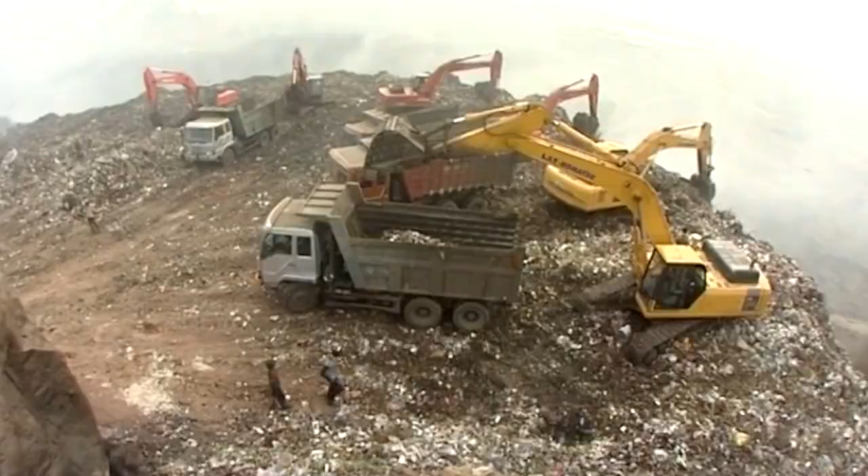The population growth, rapid urbanization and the changes in the city of Hyderabad has seen the coming of the Greater Hyderabad Municipal Corporation. The GHMC is the local government for the cities of Hyderabad and Secunderabad. Improper management of municipal waste by disposing it unscientifically into open dumps and landfills is creating huge problems to public health and environment.

With a commitment to better the environment and to provide the best sanitation services to the citizens of Hyderabad, Ramky Enviro Engineers, a pioneer in waste management, has established a quality delivery system, the Integrated Municipal Solid Waste Management Project. The HIMSW project uses the most environmentally sound strategies for municipal solid waste.

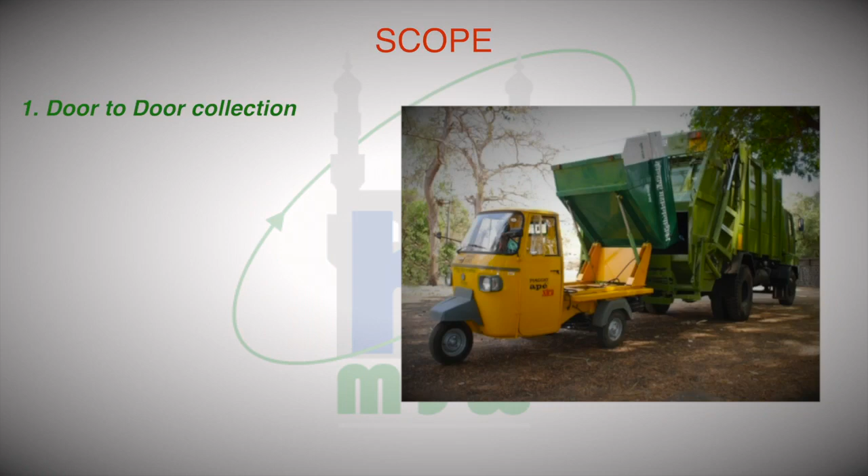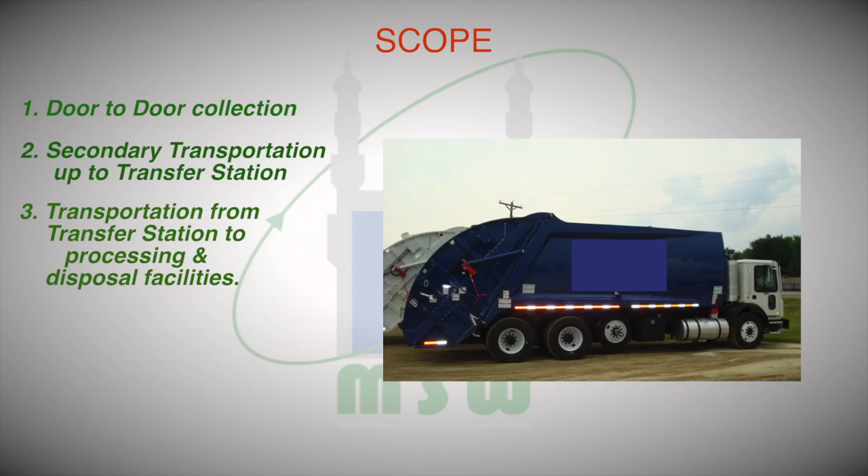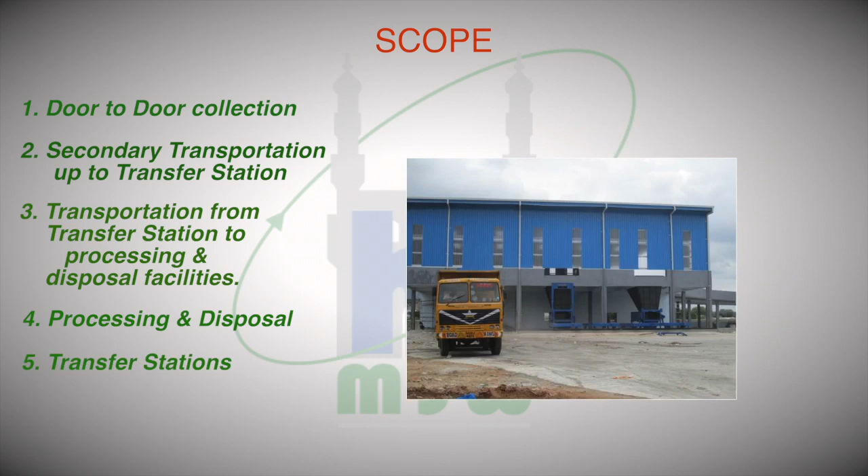Scope: door-to-door collection, secondary transportation up to transfer station, transportation from transfer station to processing and disposal facilities, processing and disposal, transfer stations, reclamation and alternative use of existing 4 dump sites.

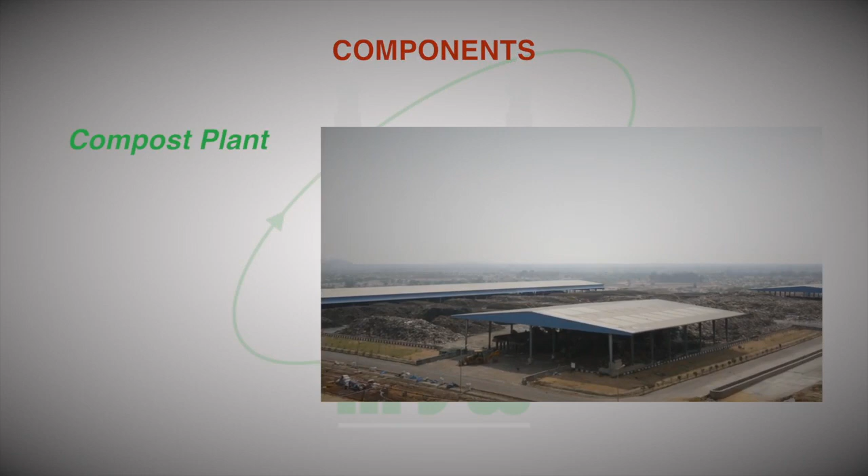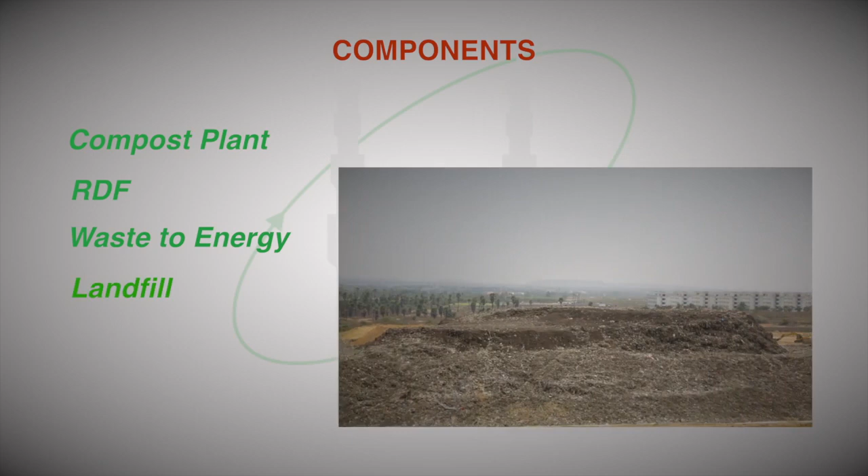Components: compost plant, refuse-derived fuel, waste to energy, landfill operations, capping of existing dump, leachate management.

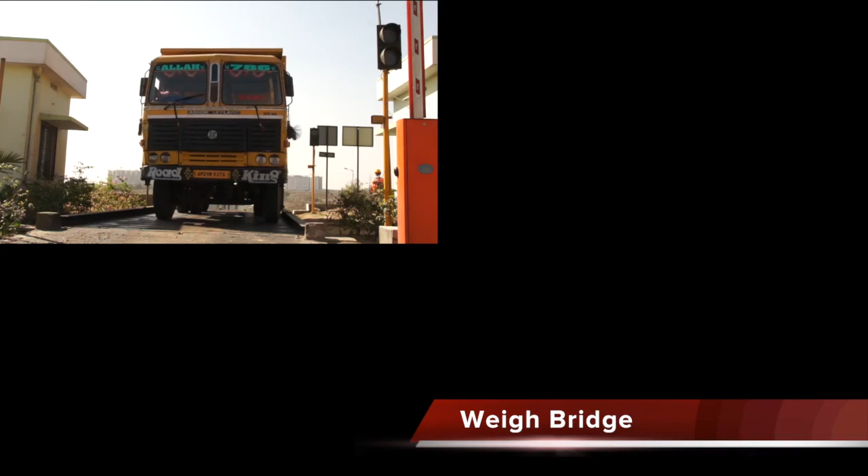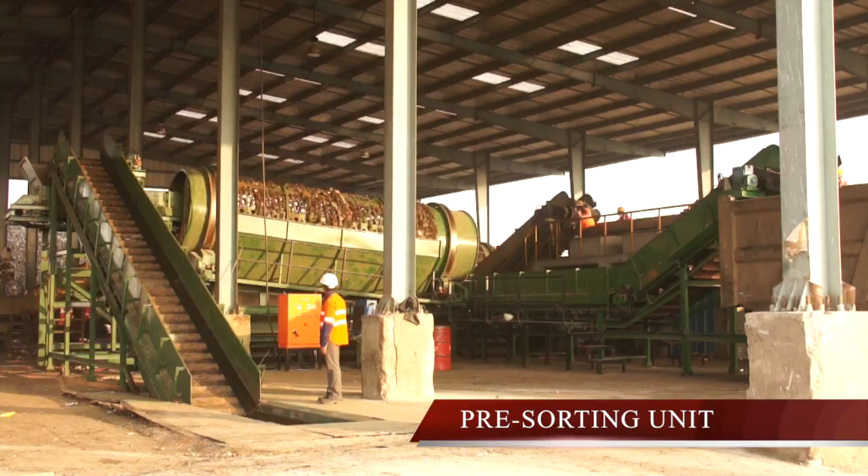The waste transported from the transfer stations is brought to the facility where each truckload is weighed and data entry is made using computers with data servers for storing and retrieving each entry. The weighed trucks are offloaded at the tipping floor of the pre-sorting unit and loaded onto conveyors using dozers. The waste is passed through a 100 mm rotating screen, or trommel, with screens of 100 mm sieves.

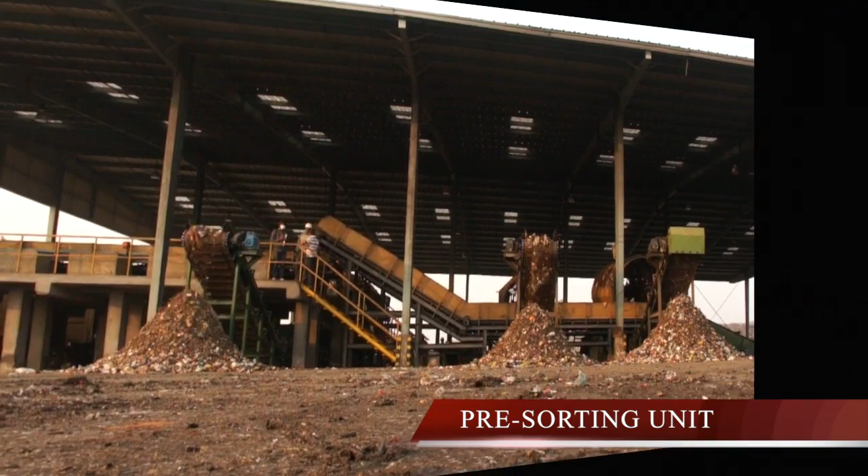The recyclable material, like plastic bottles, is recycled at a recycling plant inside the facility. The material besides the recyclables, with size more than 100 mm, is known as combustible material due to its high calorific value.

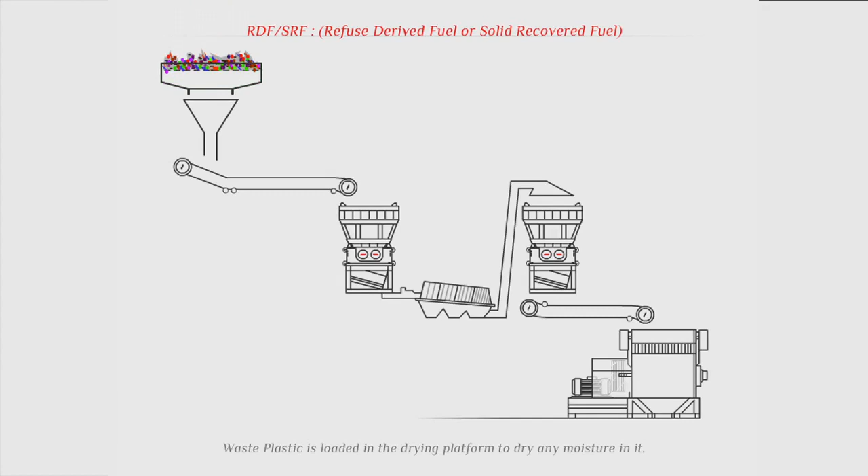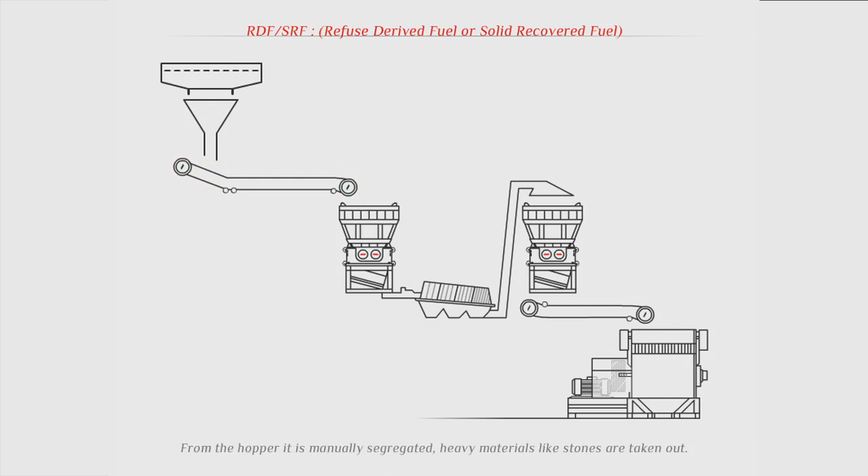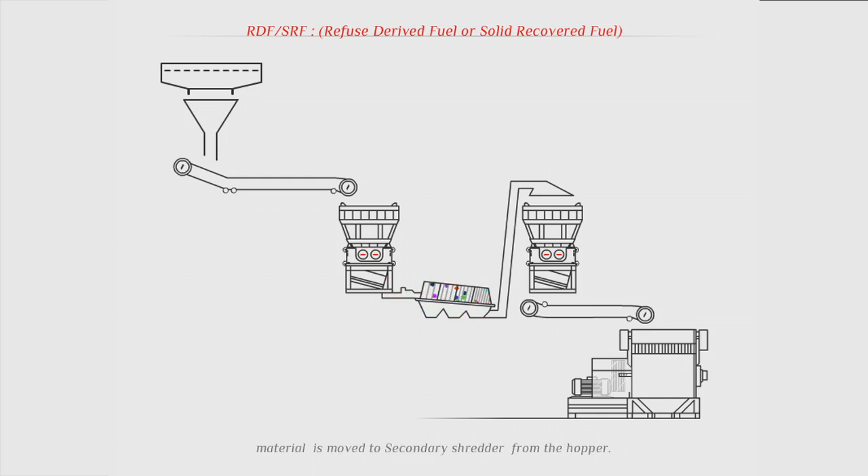Refuse-derived fuel: the segregated combustible material is further processed to get refuse-derived fuel, or solid recovered fuel. The combustible material is stored on a dry concrete platform to ensure maximum moisture removal by sun drying. The dried material is fed to the hopper of a primary shredder, where material greater than 100 mm is shredded to 80 to 100 mm material.

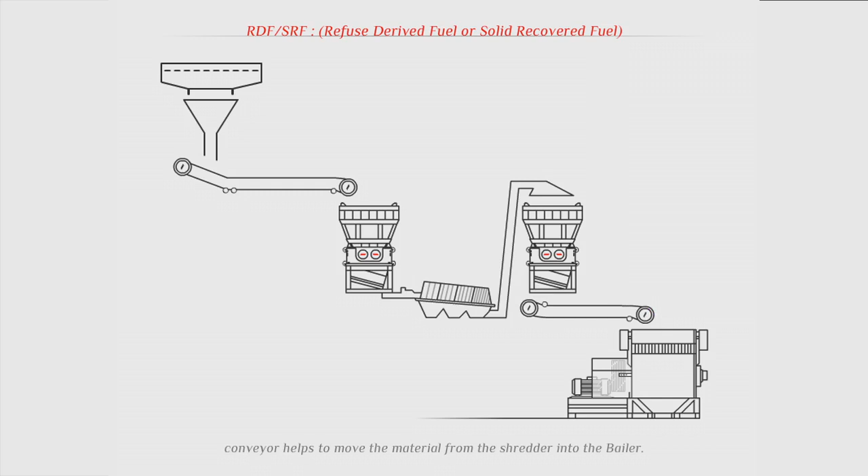The primary shredded material is fed to the hopper of a secondary shredder that reduces the material size to less than 25 mm. The secondary shredded material is then conveyed to a baling machine for packing the material. These bales are then stretch wrapped and transported to cement industries as fuel.

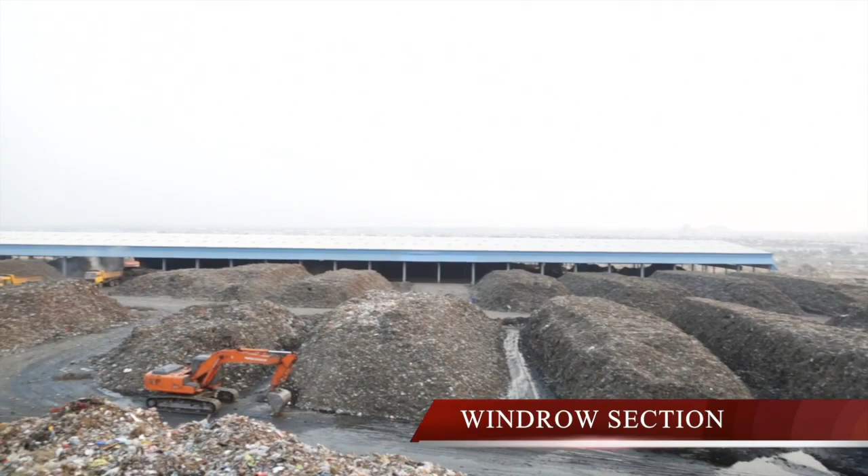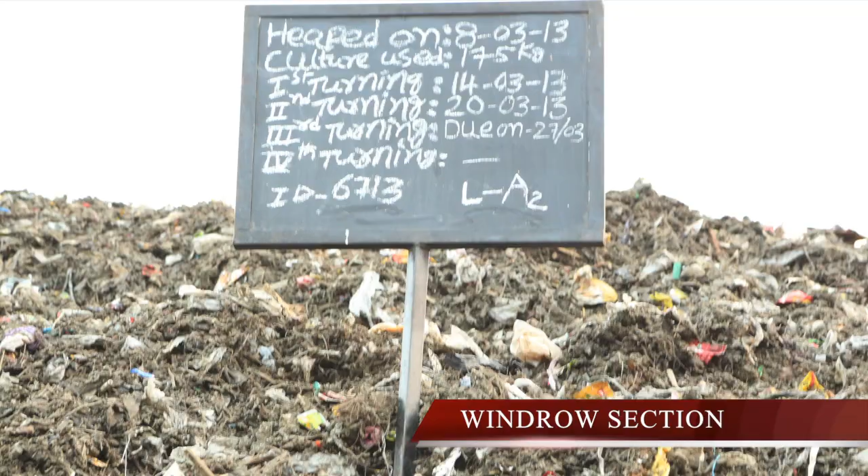The segregated material passing through the 100 mm sieves of the trommel is further processed using the windrows process. The windrows are turned for 28 days to ensure complete exposure of organic material to oxygen. The windrows are sprayed with herbal sanitizers to ensure better decomposition and ensure no odor is generated.

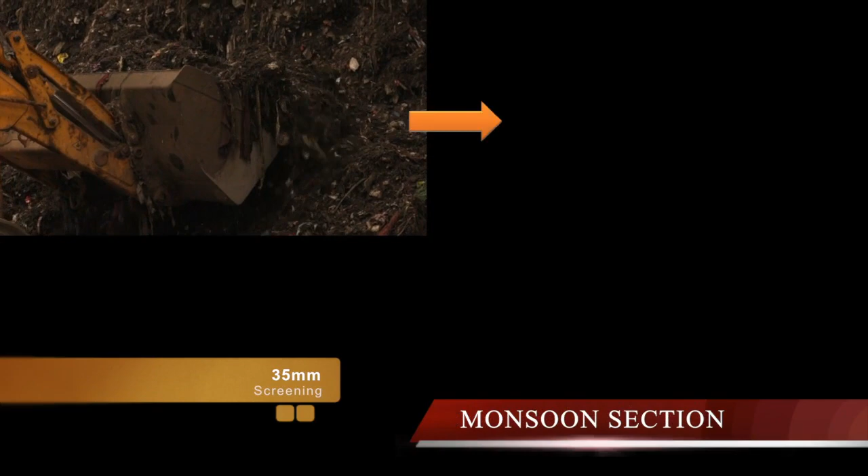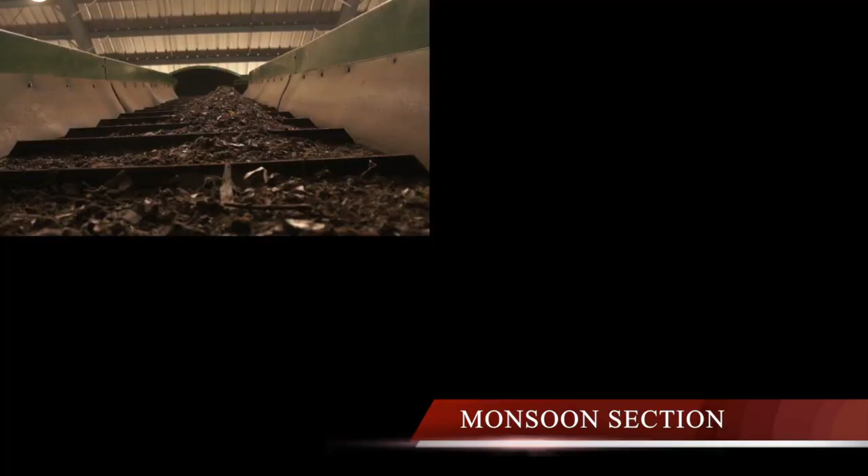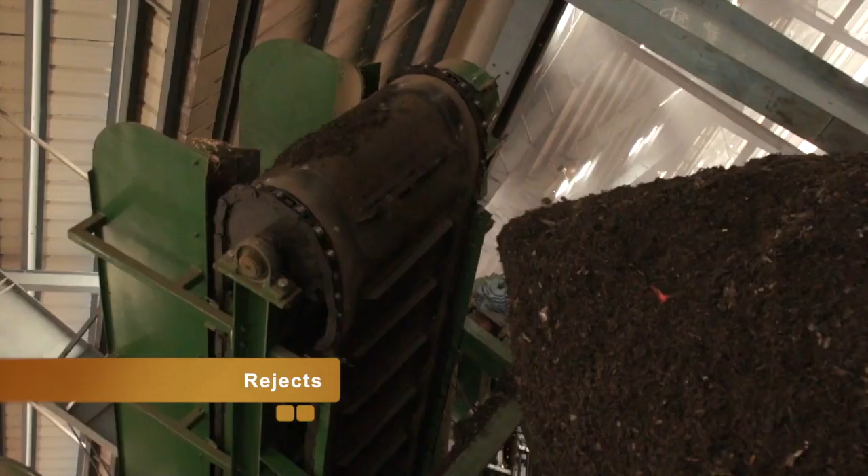The material from the windrows section is further refined by passing it through rotating screens of 35 mm sieves. The material with size more than 35 mm is segregated, which can be briquetted and used as an alternative fuel to fossil fuel in energy-intensive industries. Material less than 35 mm is further screened using trommels with screen or sieve size of 16 mm. The material with more than 16 mm size is segregated and briquetted for cement industries as fuel. The material less than 16 mm is stored in the curing section for final screening and curing.

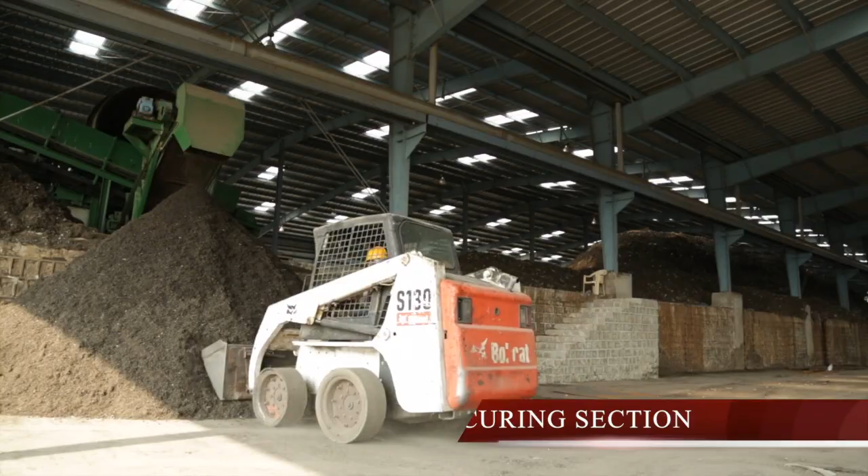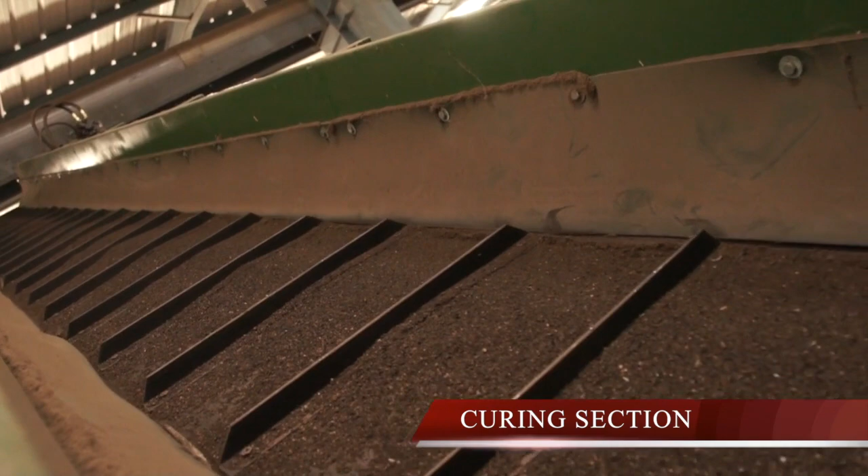In the curing section, the output of 16 mm screening is sent through a final set of screens or trommels, which segregates materials less than 4 mm. The final output is refined, meeting the fertilizer control order standards, and is used as biofertilizer in the agricultural sector.

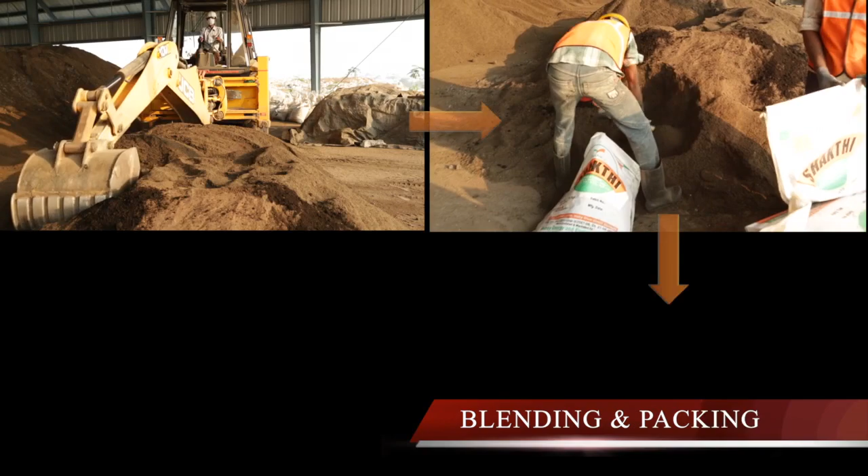The final output is further blended with additives to improve product value and packed in a blending and packing shed for dispatch to fertilizer companies. Other recovered products include coconut coir pith from shredding of coconuts.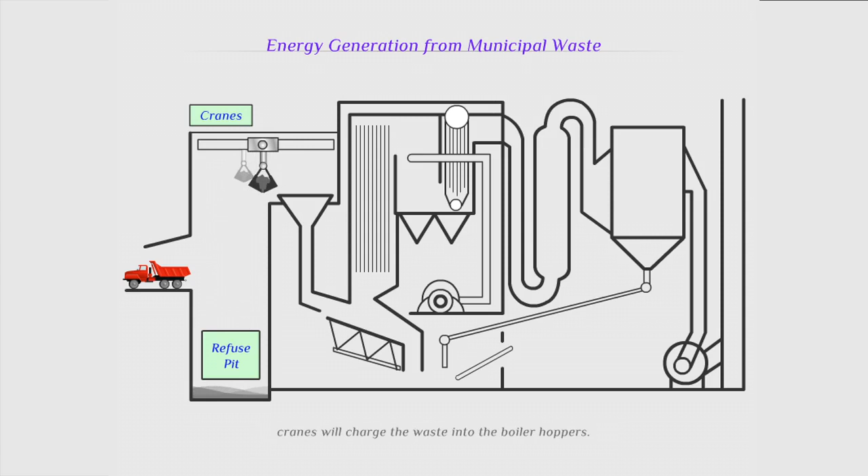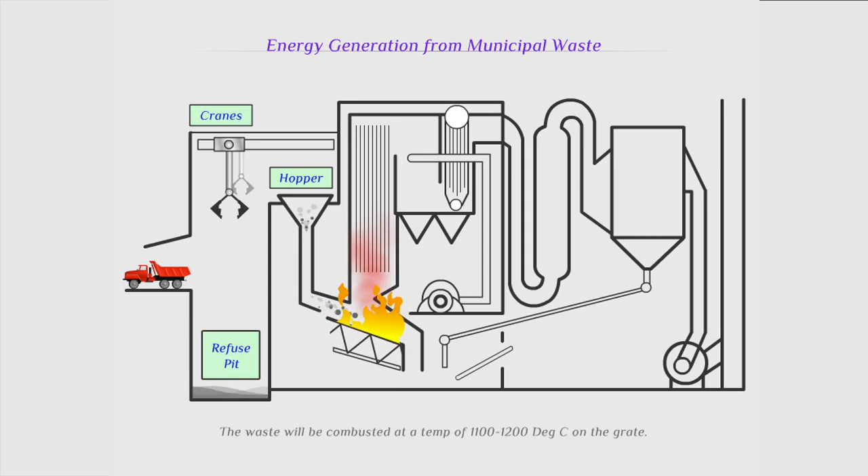The waste is then passed onto moving grates that combust it at a temperature of 1100 to 1200 degrees centigrade. The engineering design of the furnace ensures that the intermediate gases go through complete combustion to maintain a temperature of 850 degrees centigrade. Maintaining this temperature ensures that dioxins and furans are not formed in the process.

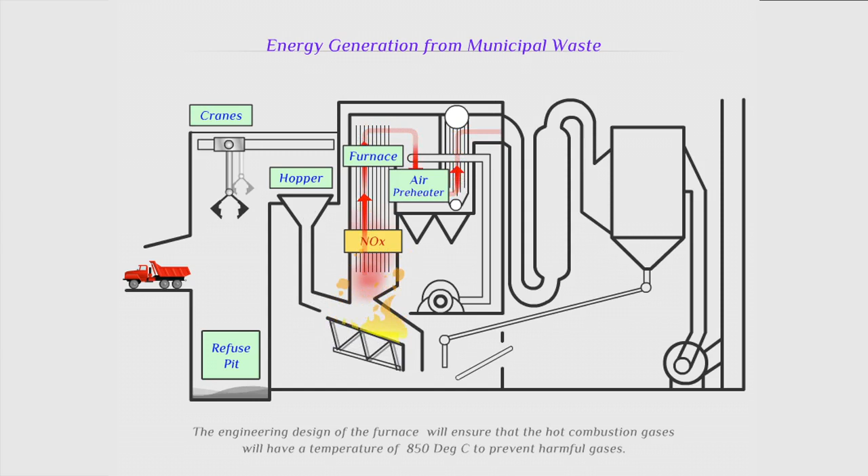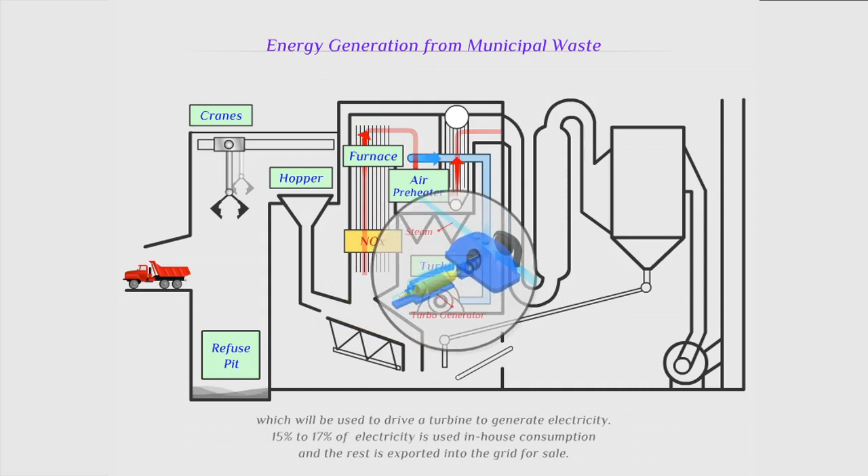The heat energy is passed into a boiler for generating superheated steam. This steam is used for driving the turbine and electricity generation. The electricity generated is exported to the grid after captive consumption of 15 to 17% of total electricity generation.

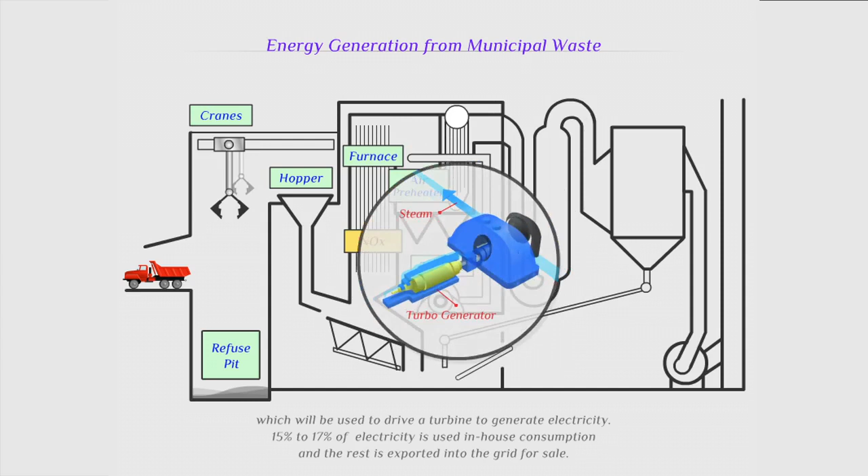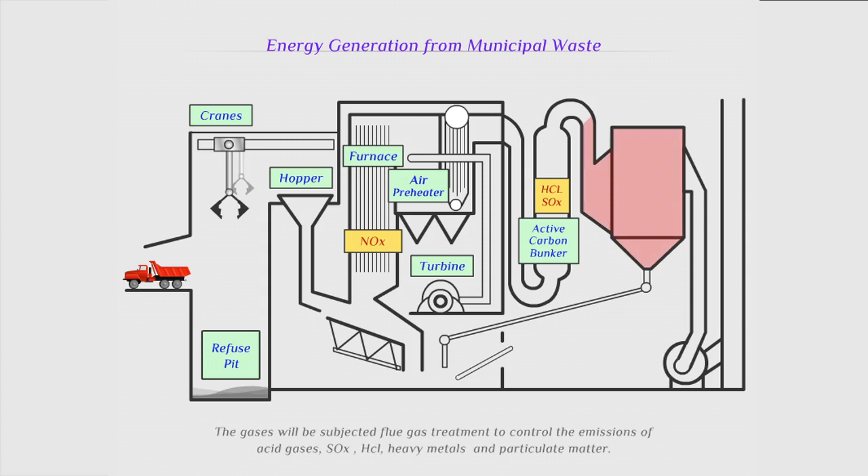The residual gases from the process are passed through an air pollution control system, which comprises scrubbers for removal of acidic gases such as nitrogen oxides, sulfur dioxide, hydrochloric gases, any heavy metals, and activated carbon filters. Any particulate matter is removed using dust collector systems and precipitators. The bottom ash from the incineration process is removed and can be used for construction purposes.

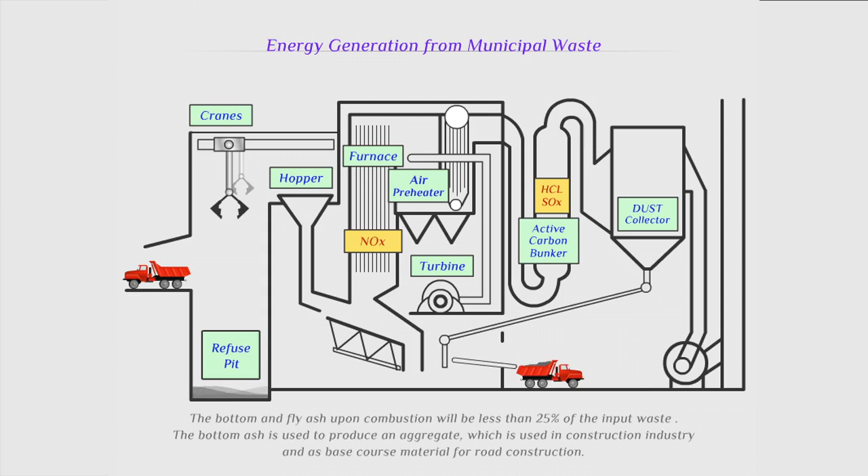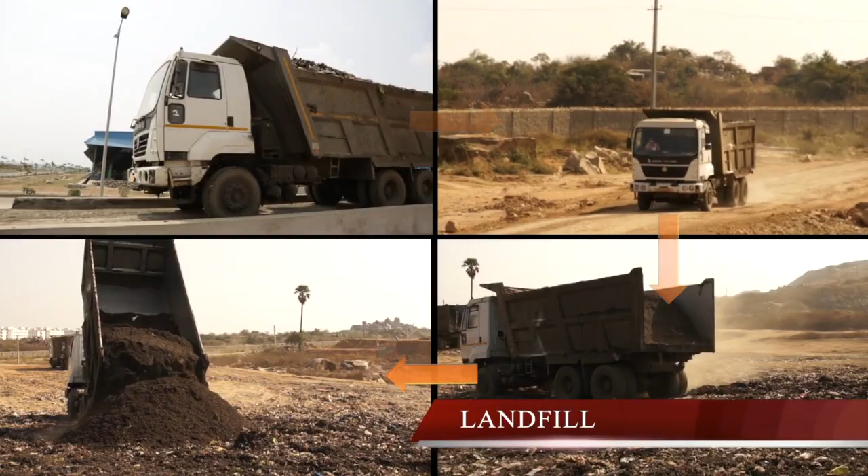Landfill. The processing of waste generates various byproducts. The inert material that is essentially present in the waste, or is a rejected material of the process, is disposed of in a secure landfill.

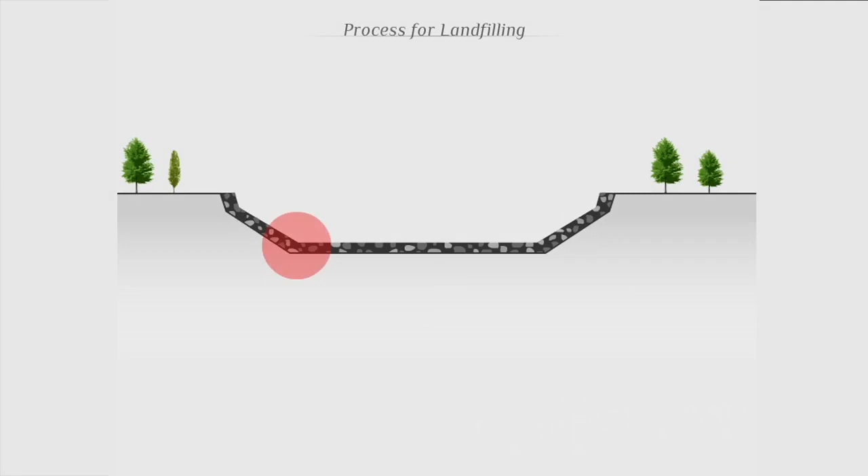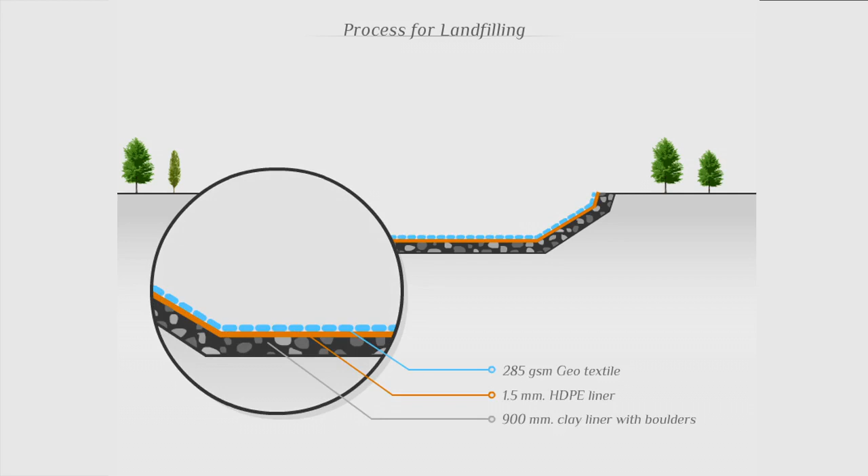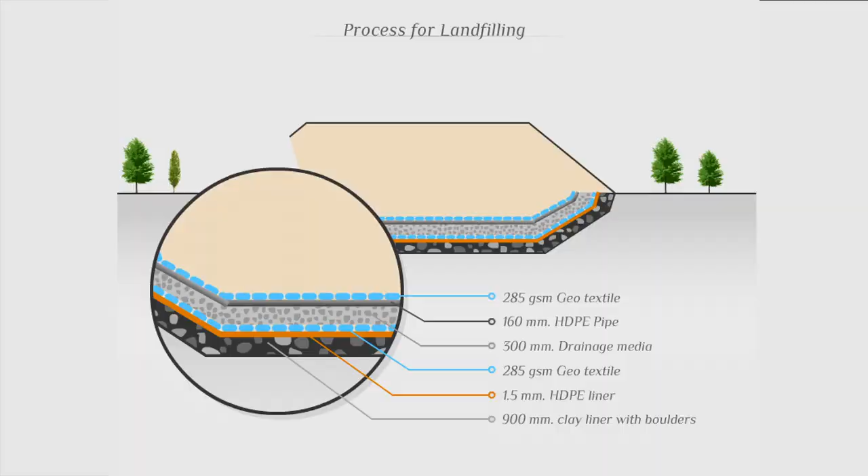The landfill comprises multiple layers of boulders, clay, HDPE sheets, geotextile, and a leachate collection network of HDPE material. These layers are of varying thickness to ensure that no leachate from the landfill percolates into the soil and groundwater. Landfill operations are closely monitored to record any leachate movement.

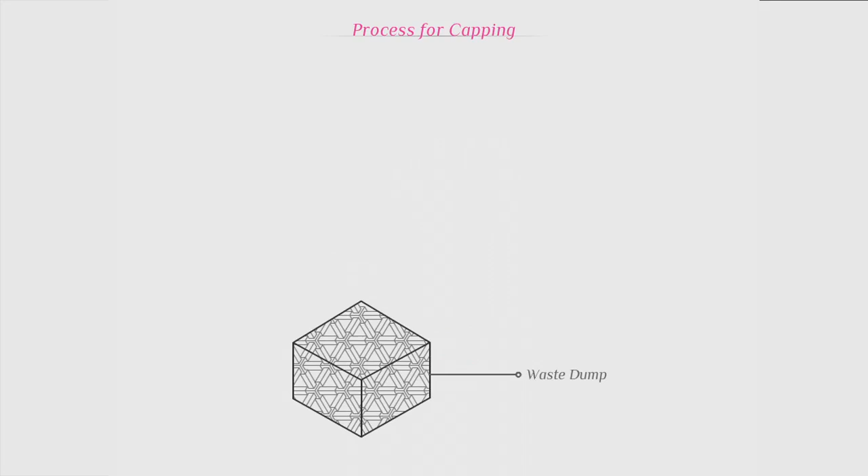Capping. The existing site for the waste management facility has a legacy of years of waste dumping. The waste dump is capped using scientific methods. The process requires laying an HDPE piping network for collection of leachate, covering of soil followed by clay lining, and geocomposites.

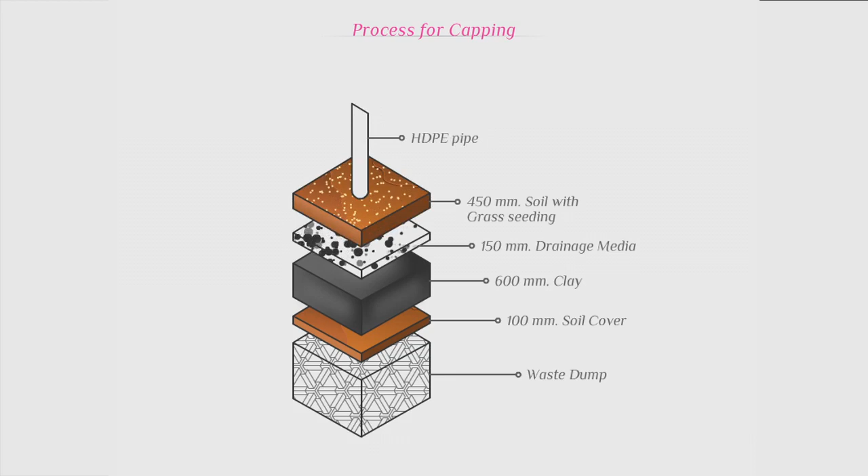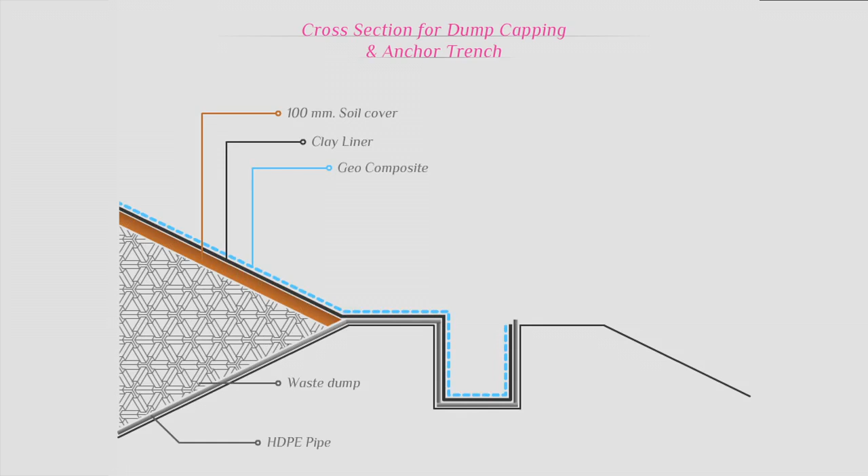An additional thicker soil layer and vegetation cover are applied. A piping network is also laid for collection of any methane gas and flaring, to mitigate release of greenhouse gas emissions.

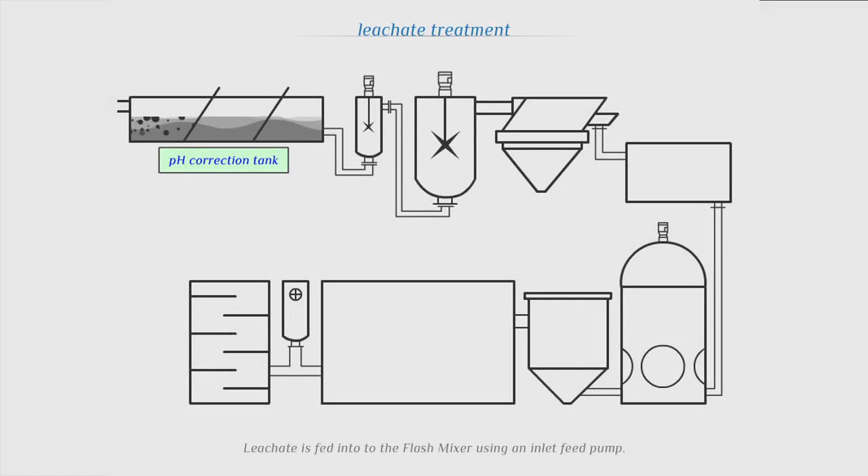Leachate management. Leachate management is a crucial aspect of the HIMSW project. All the waste stored and waste management processes generate leachate. The leachate generated at site is collected through an extensive pipeline network. Raw leachate is pumped to a chemical dosing tank with a flash mixer.

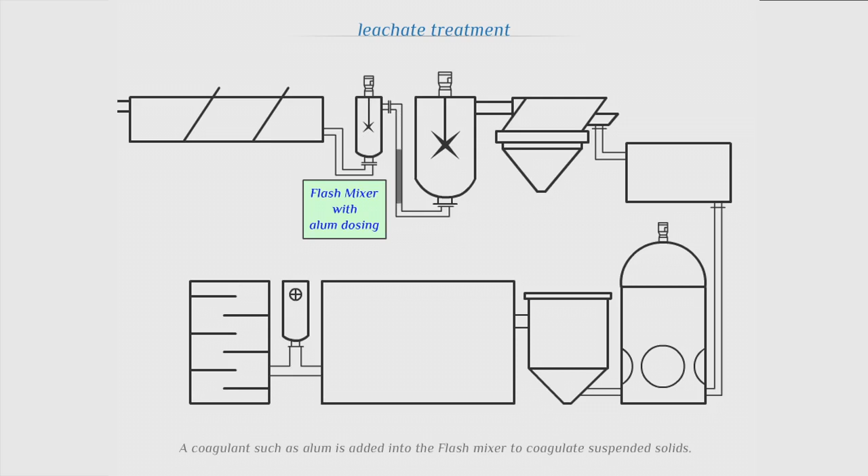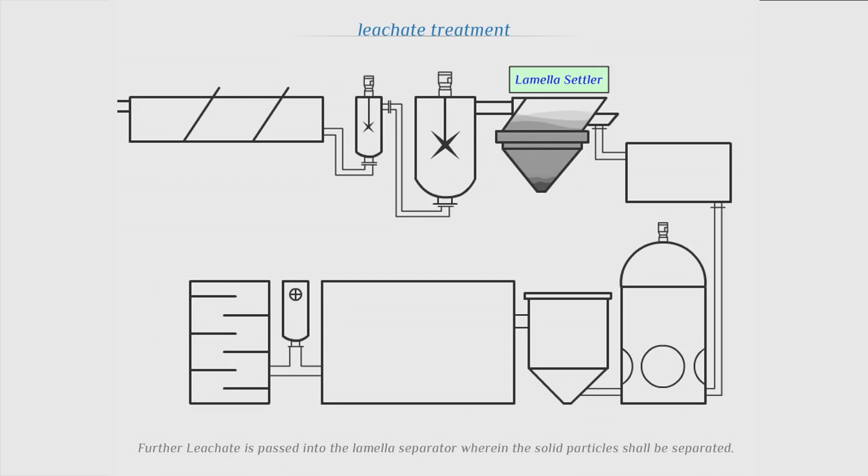Alum or coagulant is added to the tank to create flocks from the suspended solids in the leachate. The leachate is passed into a lamella settler that settles the flocks of suspended particles. The supernatant is passed through pressure sand filters that remove the remaining suspended solids and reduce turbidity.

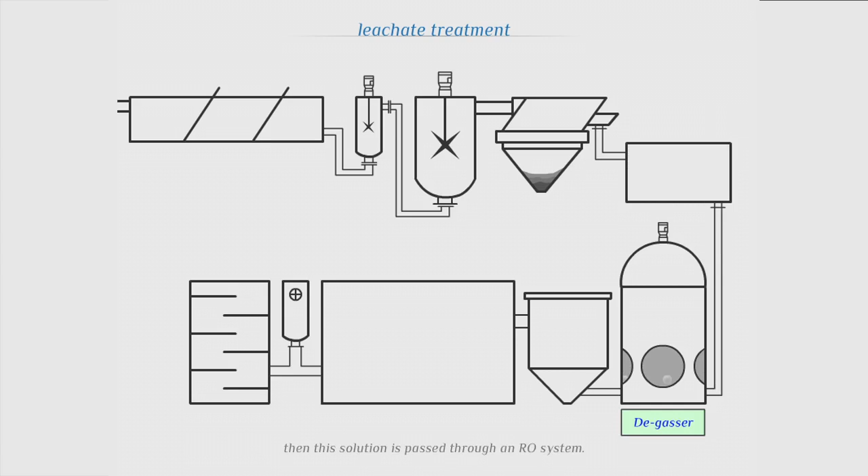The leachate is then passed through a two-stage reverse osmosis system, which uses membranes for filtering the leachate of all contaminants and providing clear permeate, which is used for greenbelt and landscaping development.

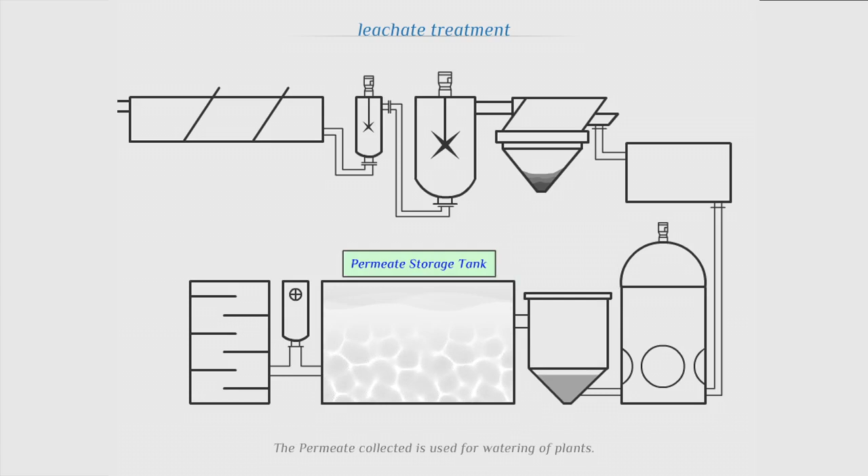As we do our bit for the environment and for the generations to come, we strive to deliver service excellence, to save natural resources, conserve energy, reduce pollution, reduce the toxicity of our waste, and save money for consumers and businesses. The project is a model for inclusive and sustainable development for our society.

HIMSW extends the vision of the Ramky Group towards sustainable development.